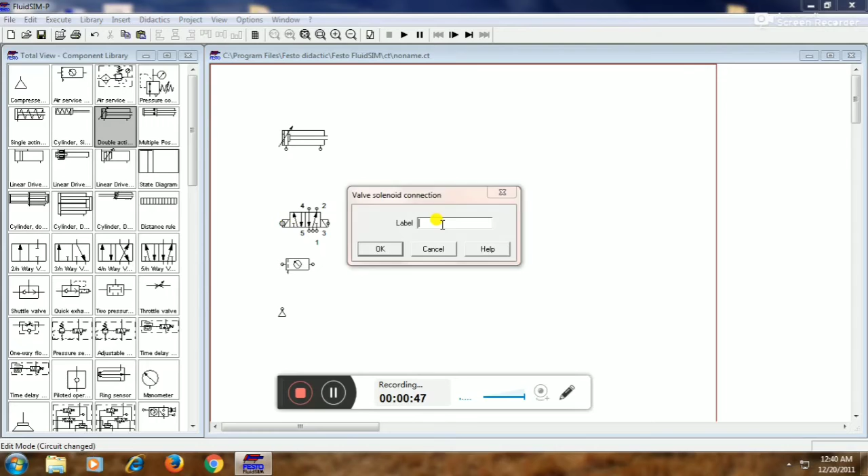In the 5 by 2 valve, select solenoid on both sides of the valve. Click OK. Now name it as S1, and S2 on the other side.

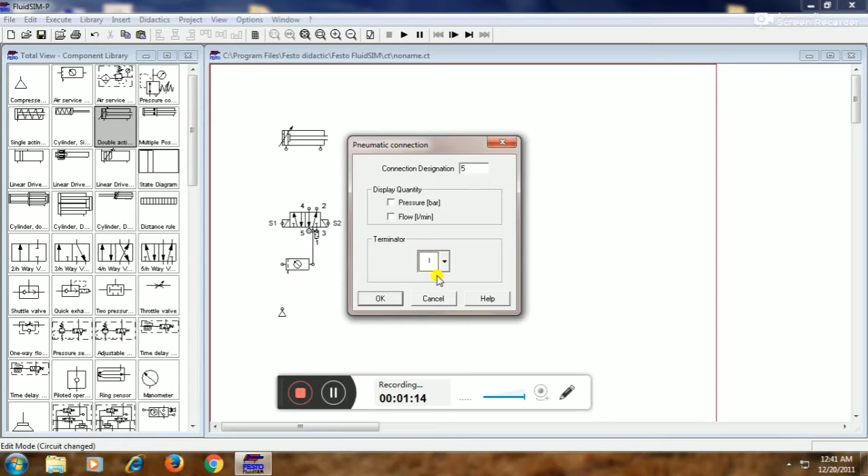Now let us connect all the components as shown in the video. Make this as exhaust, and this also as exhaust. Connect it to the compressor. Now connect the valve to the cylinders. So this is the electro-pneumatic circuit.

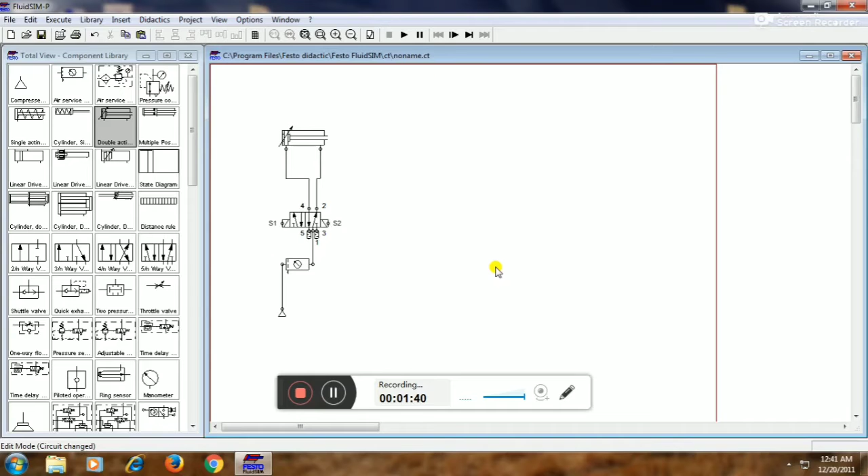This is the electro-pneumatic circuit. So let us build the electrical circuit for this experiment. We need 2 volts, one is 0 volt, another is 24 volts, and select 2 solenoid valves: solenoid valve 1, solenoid valve 2.

For the operation of these 2 solenoid valves, we need 2 make switches, name it as L1, and the other one name it as L2.

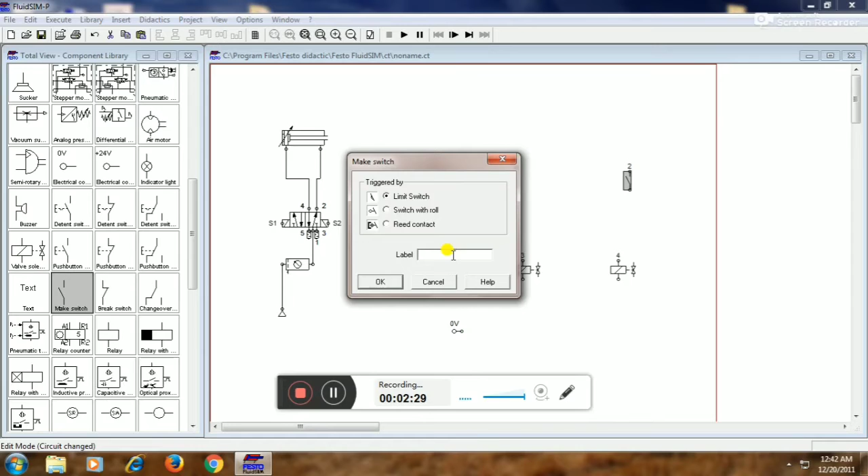Select the limits for that cylinder. Just double click on the cylinder and you get a dialog box. In the dialog box, select edit, and in the first box write L1 and make it 0, and for L2 make it 100, that is limits 0 to 100.

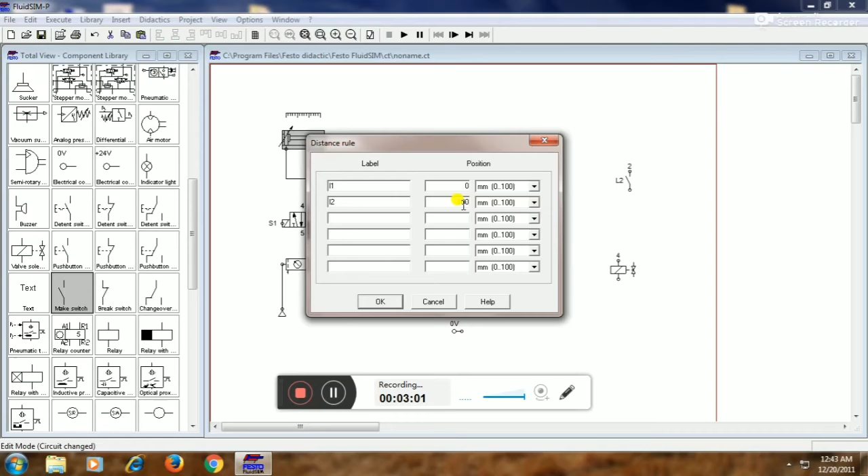0 to 100. These are the limits L1 L2, and select the detent switch for the common connection.

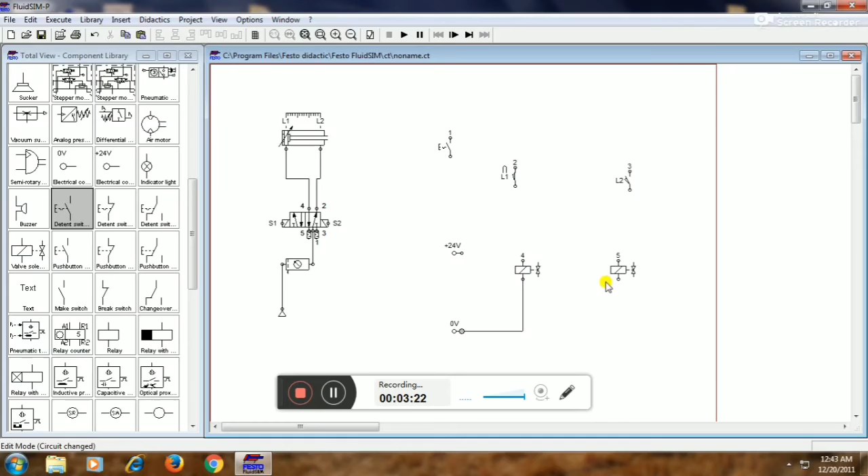Now connect the components, connect it to the common line, and connect the solenoid valves to the respective limit switches. Connect the detent switch to both limit switches, and connect the detent switch to the 24 volts.

Name it as S1, and here name it as S2.

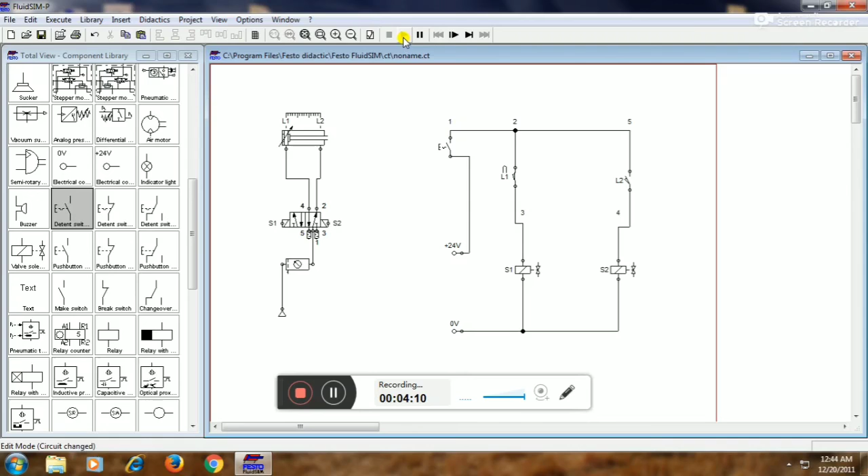Now let us check how the circuit will operate. Start and switch on the detent switch, and now see the automatic reciprocating of the double acting cylinder, how it will work.

Alternatively, limit switch 1 will turn on, then alternatively limit switch 2 will turn on.